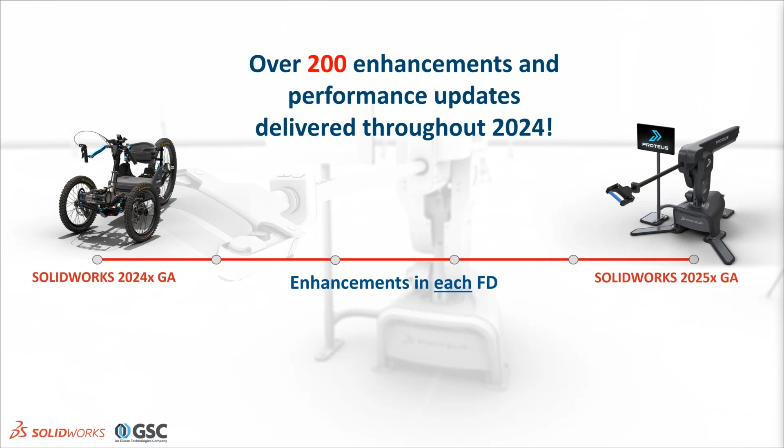So anyway, that's what we're talking about now. It's not just we wait. If there's new functionality or a performance enhancement code that is ready to go, we're going to deliver that as soon as possible and not just wait till the arbitrary end of the year to put it in one big mass release. That's an evolution you're seeing now, and you're also going to see that as we go forward.

With that, we're going to turn our attention now to this episode, episode 3. We're going to be talking about the next generation tools in the guise of SOLIDWORKS Cloud, DraftSight, and SOLIDWORKS Ultimate. Now, SOLIDWORKS Cloud is what Dassault calls it.

These are the X applications. They're not exactly SOLIDWORKS. They're the future kind of, hey, what do we do when we don't use Windows anymore or whatever? We want to be cloud-based completely in a browser. That's the X applications, and there's a bunch of different ones out there that have different functions and different names. Collectively, they're calling it SOLIDWORKS Cloud. I'm not super wild about that, to be honest, but that's what we're talking about.

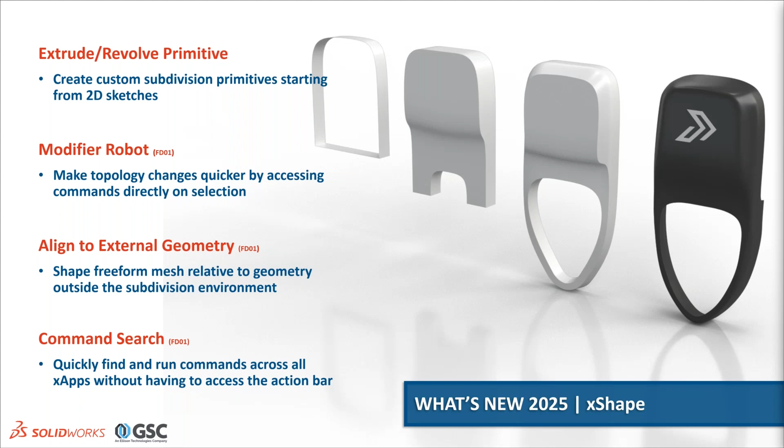So we're talking about X-Shape, which is our subdivisional Class-A type surface modeling, but super advanced. We're talking about some of the enhancements we've made to that, which are very much user driven, making things easier and also more familiar to CAD-like workflows we've done in the past.

Also in our X Design app, which is more of the part and assembly type app, we have a lot of new things there. Again, some of these you recognize, things that have been in SOLIDWORKS for a while that have made it into X Design.

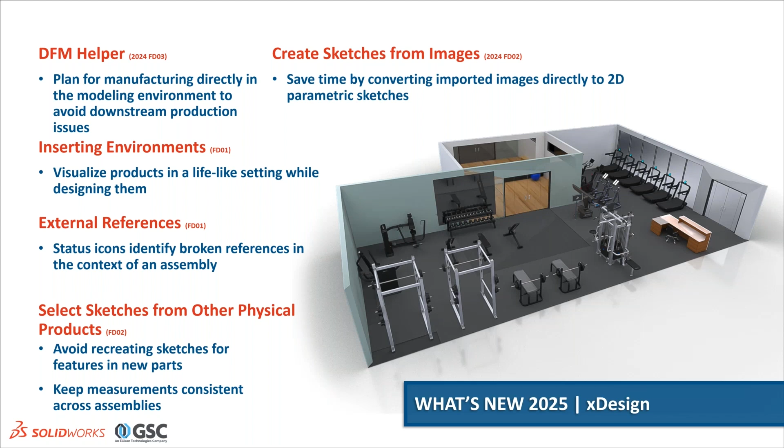I also want to touch on X Drawing. Some people were like, well, once you get into cloud-based, browser-based 3D modeling, you're not going to need drawings. I remember people early on in SOLIDWORKS back in 1995 and '96 thinking the same thing. Of course, we always need drawings. So we do have a browser-based app, and it's getting enhanced all the time to be as useful as what we're used to on the desktop side.

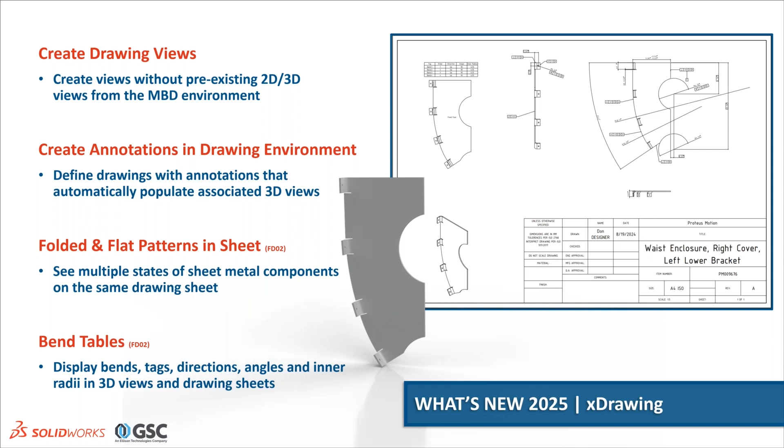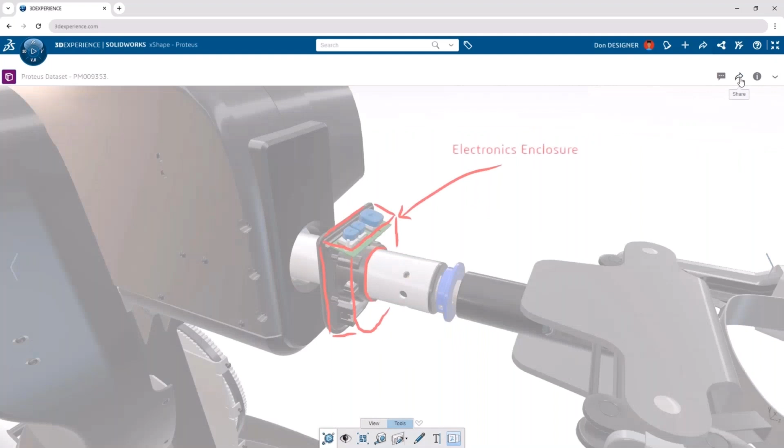First thing I want to talk about is communication. Right inside the X apps, we have all the collaboration tools built in. I get notifications, I can go right into my collaboration conversations, I can share things directly in there, not just screenshots but also markups. I can go into communities, all that right inside of my X app, right inside that design interface.

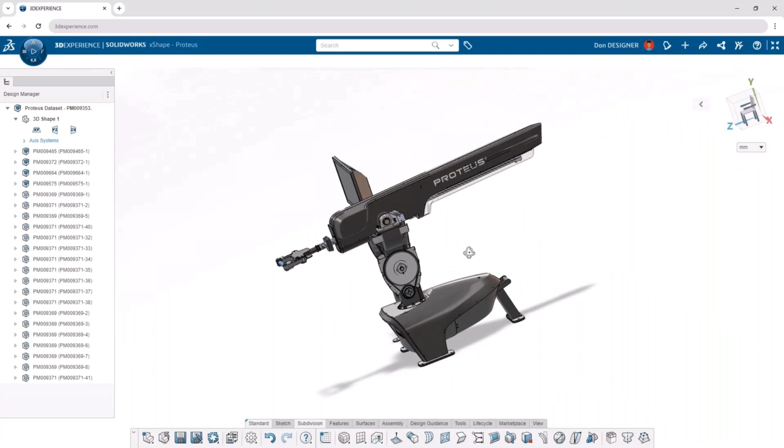Also, this is very welcome: we have a content tab now where you can just go in there and see all your stuff in 3D Space or 3D Drive or your bookmark area without having to have separate widgets and go to different panels and different tabs in your browser. They're right there, kind of where you want them to be.

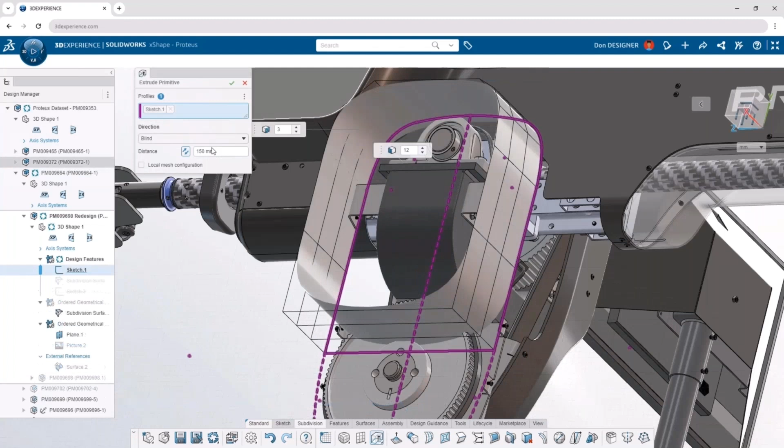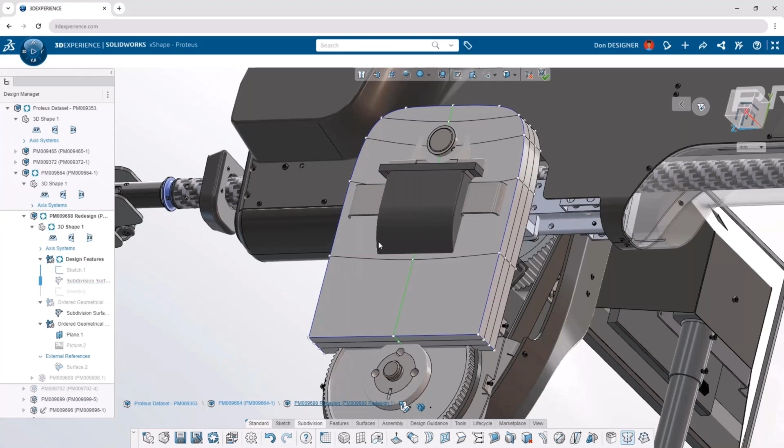Another nice thing coming from the traditional SOLIDWORKS world is we can now take sketches and extrude primitive items right into sub-D surfaces. So I can draw a shape and right away get a sub-D surface out of that, and I'm right in the sub-D modeling environment as I do that. I can go in there and do my creases, corners, symmetry, fill edges, all that kind of stuff. So it's like I draw a sketch, extrude it into a unique sub-D primitive, and then I'm right in there doing sub-D modifications on it. It's a traditional workflow meets subdivisional modeling.

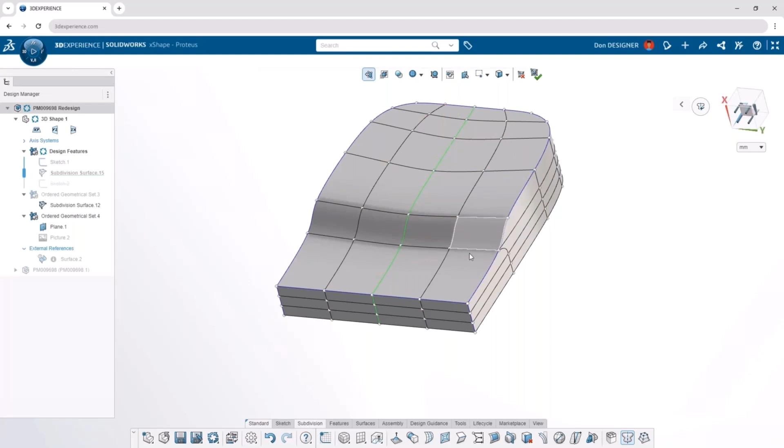In the sub-D environment we also have a new modifier robot, sometimes called a triad, but it's intuitive and context sensitive. Depending on what I have grabbed and where I'm moving things to, it's going to add material, insert loops, or create subdivision, all with one robot. It's a simple 'A' key to activate the shortcut, and you grab stuff and move the robot and it does any of those commands intuitively and automatically depending on how you use it.

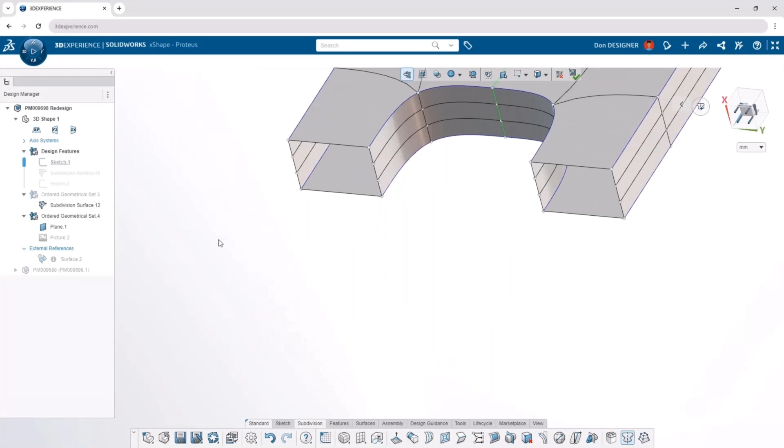We also have command search like we do in SOLIDWORKS, so the S key will do that. It's also going to bring up the revolve primitive, just like the new extrude primitive. So I can revolve a primitive based on a sketch, and that gives me right away a subdivisional surface I can modify immediately.

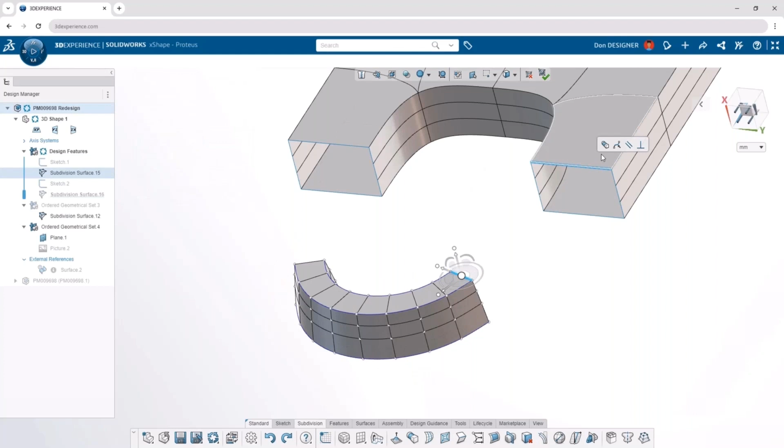Also very welcome, we now have a merge command, so you can merge surfaces together. Just be careful that you have an equal number of edge loops between the two open edges for the best results—kind of like when you're lofting, but with sub-D surfacing.

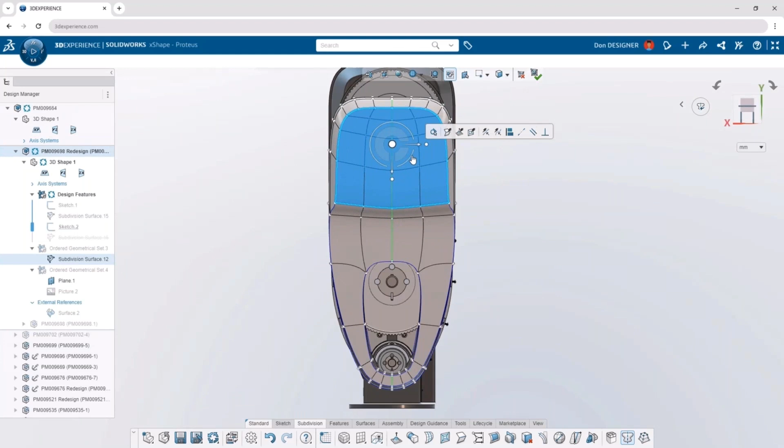When you apply a merge, right away you have a new surface that you can immediately work on. It's active, but it also keeps your old surfaces in the tree so you can reuse those anytime you want. And you can apply your typical things to move the shapes around with the robot, including influence to grab certain areas and change the influence of what you're moving around.

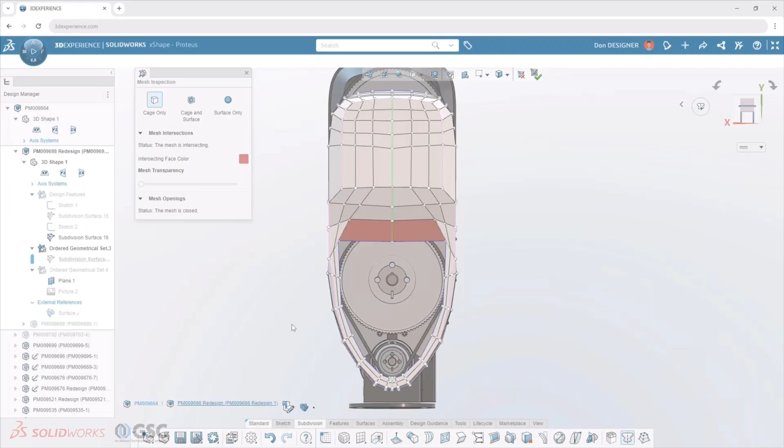We have a new mesh inspection tool which helps us see any creases or areas where the cage is not uniform. You can look at it this way, but what's also cool is that you can sculpt while this is active. So you don't have to turn on the tool, see the problem, turn it off, do the sculpting, then turn it back on to check—it's all in one shot, much more intuitive to do that kind of work.

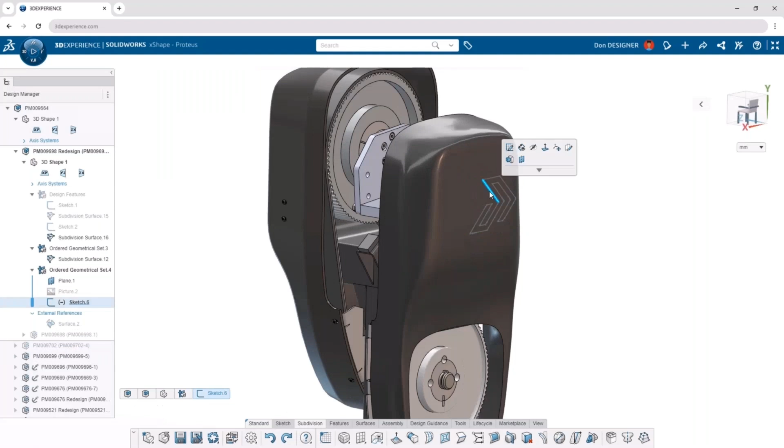We also have an image-to-sketch tool now. You take a 2D image like a JPEG and convert it to a sketch with sketch elements that you can use for extrusions or whatever. It's best to use high contrast graphics—light on black is best versus gradients—and the higher the resolution, the better it works, so a 4K image is better than an 800 by 600 image.

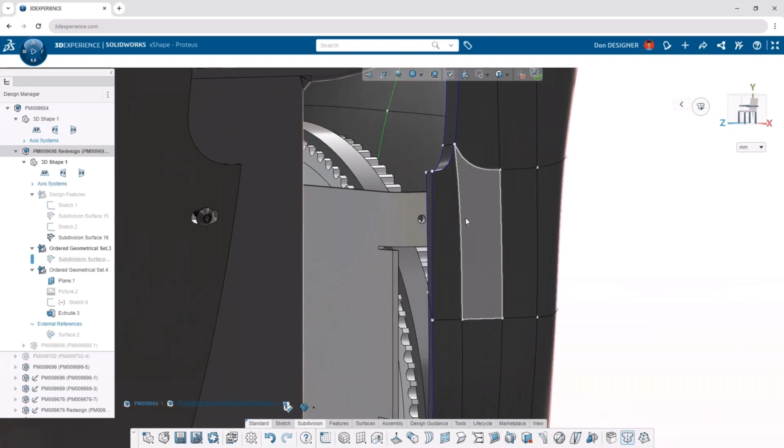We also improved some of the external geometry referencing here. If I'm modifying a sub-D item, I can reference it to non-sub-D elements like the edge of this sheet metal piece, for example. And I can also select sketches from multiple physical products, like in an assembly situation, so I don't have to duplicate the geometry to be able to reference these things.

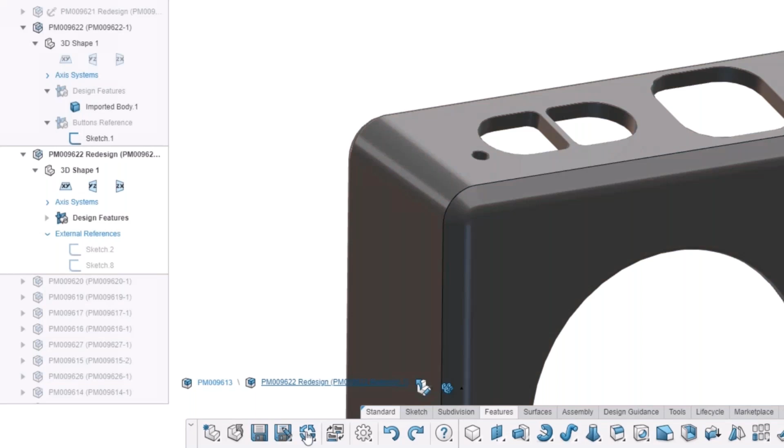It's a lot more intuitive, more SOLIDWORKS-like, you could say. I could choose a sketch from whatever component I want, anywhere in any of the physical products or parts, and base a cutout from that, for example. I can either break the relation or leave it intact, so that if the sketch gets changed or something updates, I can run the update command, say go ahead and fix that up, and we'll get the new sketch geometry as well as the new feature geometry based on that.

Creating patterns, linear or circular, is easier now because we have an on-screen graphic display for those. So you can easily, intuitively do that or type in the numbers. We can skip instances if we want to.

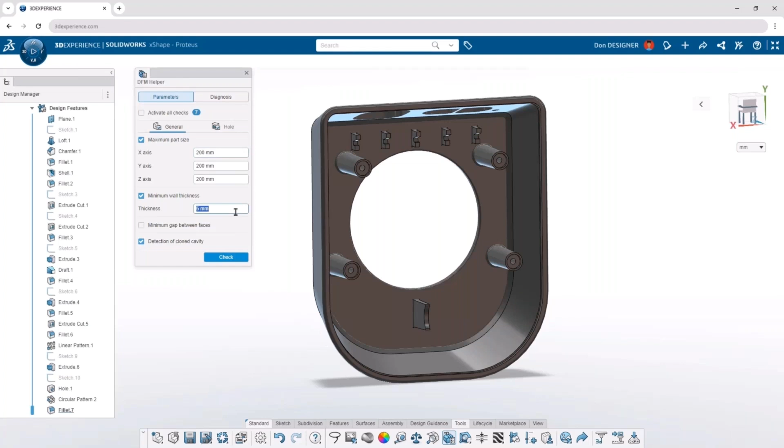And also we now have a DFM helper that just looks at the reality check. So things like minimal wall thicknesses, or if I'm looking for a closed cavity, I want to make sure I have something like that for a molded part, or I can look for holes in a certain range of sizes, so people aren't needing specialty fasteners, that kind of stuff. So it's a DFM helper that's built in here with the X apps.

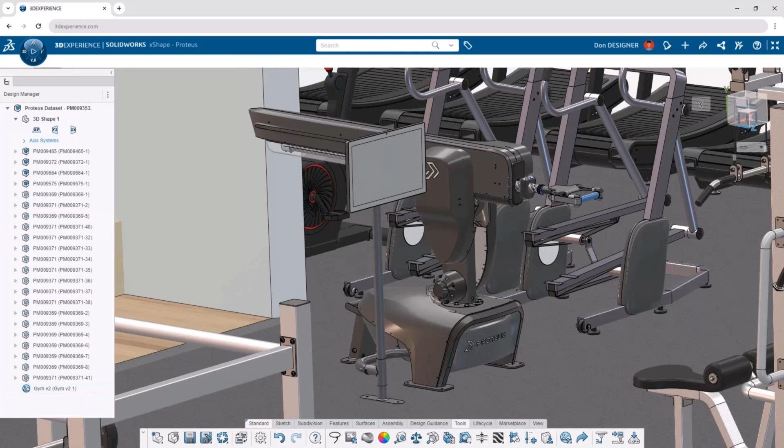And then also we can insert environment envelopes in assemblies, so you can grab an environment; there are some built-in ones, or you can modify your own. And you can throw these things in an environment. It's a 3D model basically, but it's not part of your design as such. You can manipulate the items in the environment in space, and you can turn them off and things like that. Just a quick way to put your actual product into an environment, for props and things like that, which is great for rendering and whatnot.

Now, assemblies have been upgraded in a number of different ways. The insert component command remembers the things you've recently been working on, so you don't always have to search. You just insert it and, oh yeah, that's the thing you were just working on, so we'll make that available for the insert command. Smart mates still simplify things by adding mates while dragging and dropping. You can also use zoom to selection while you're doing this now, which isolates where you're working and zooms you in there.

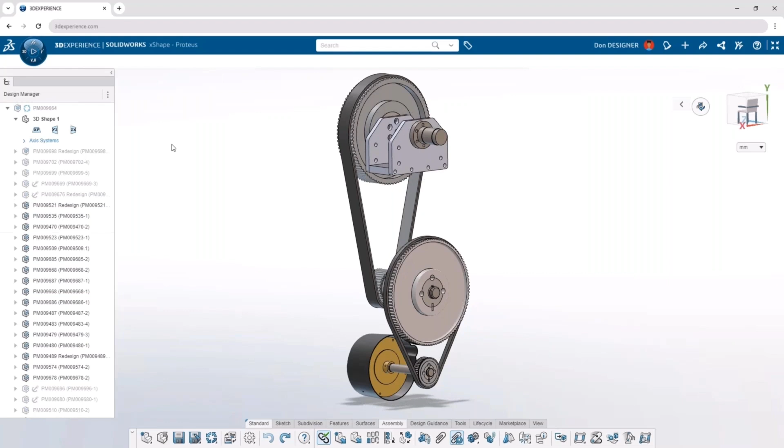Also in assemblies, when you isolate components, you can now isolate with dependents, so you can show things that are attached to it, dependencies, intuitively and quickly, as opposed to remembering what they are and individually doing that through the tree or the graphics window.

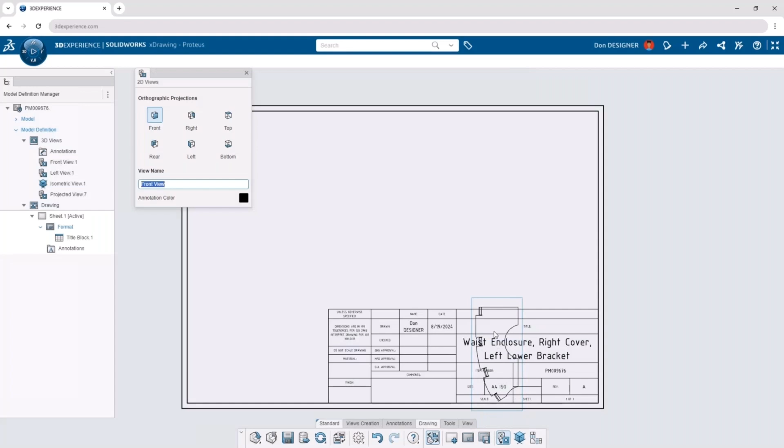Now let's look at the xDrawing tool, which allows us to make 2D drawings or 3D MBD type documents right in a browser. A lot of enhancements are going to the 2D side. To be honest, it's what people are looking for. So we can create views in 2D or 3D. We can do the typical annotations that we normally would based on the standards we're using in our drawings. Again, I'm using an ISO standard here. Add dimensions as you normally would.

Also, we can create hole callouts. You can leverage stuff from the model in 3D as well and use those in our drawing. And anything that we do on the 2D side, we're actually doing in the model. So it's captured on the 3D side so that you can use it for MBD workflows. In SOLIDWORKS CAD, MBD and drawings are separate items. If you do MBD stuff, you can show it in your drawing, but not the other way around.

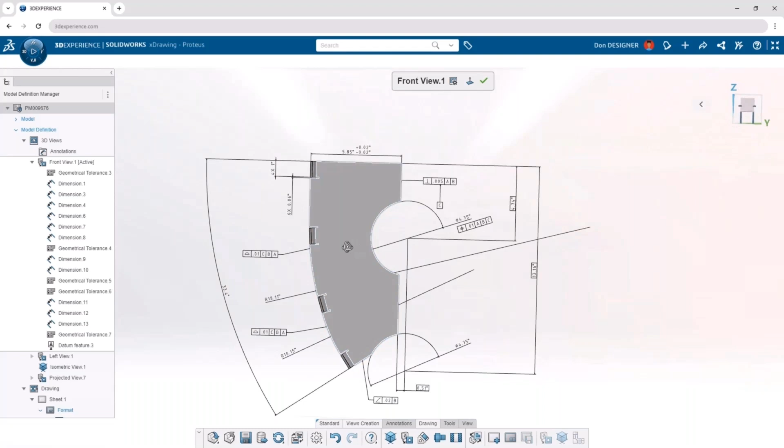In xDrawing, you're actually working on the model even though you're working in the views. So when you add annotations to your 2D drawing views, they're also available in the 3D model automatically. That's a very cool new paradigm to be working in when you're documenting your models. Again, we have the same kind of thing we had before, and it's intelligent, so it knows whether you're in drawing mode or 3D mode.

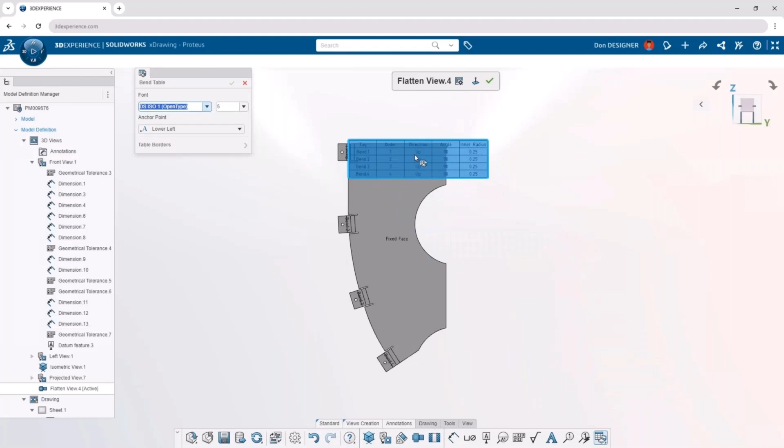We can now have bend tables, and I'm doing this right in the 3D model environment to show different things here. When I flatten it, it shows a bend table. When I go into xDrawing, all that stuff is available in that flattened view from the 2D or the 3D model.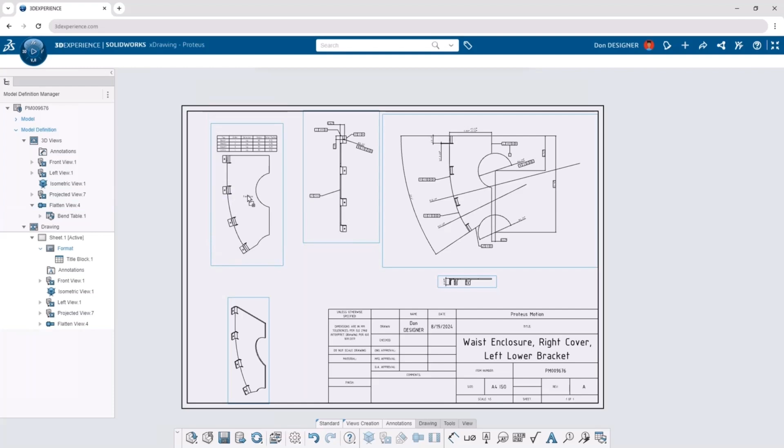So yes, X drawing has a lot of room to grow in terms of functionality and being able to do all the myriad specialty annotations that we've enjoyed with SOLIDWORKS drawings being around for 33 releases. But understand that for this future state, X drawing is a different way of looking at your model, and it truly is working with the model in the background. So you don't have this divide between 3D annotations and 2D annotations. Whichever app you're working with, whatever you do on the 3D side goes to the 2D side or vice versa. It's a very cool way to work.

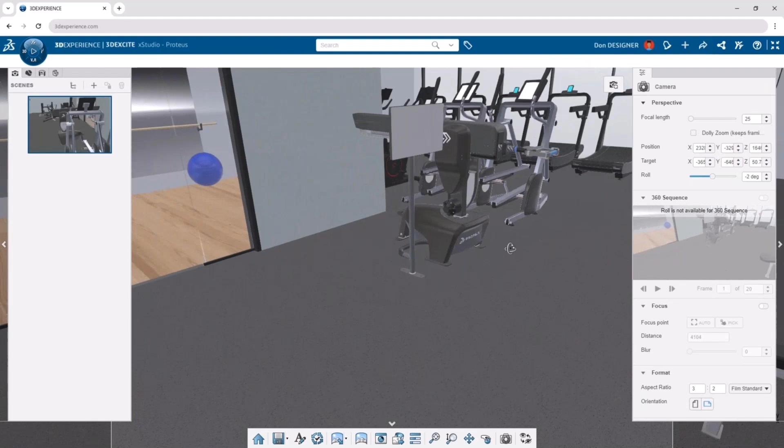And the last thing I want to highlight in the SOLIDWORKS Cloud offerings is X Studio. We have X Sheet Metal and other things too, but X Studio is sort of an unsung hero in that you can actually do nice photorealistic renderings in X Studio, but you're in a browser again. So it's, again, not having to work on a local machine and take up all the resources there. You can't do everything that Visualize Pro can do at this point, but you can do quite a lot.

If you're just trying to get some nice materials put on things, some nice camera effects, being able to really quickly get the standard orientation and size and aspect ratio and just pop out some quick renderings, you can actually do that right inside your browser with the X Studio app. That's, again, part of what we're calling the SOLIDWORKS Cloud suite of browser-based tools. So that's SOLIDWORKS Cloud, the X apps and some of the enhancements there.

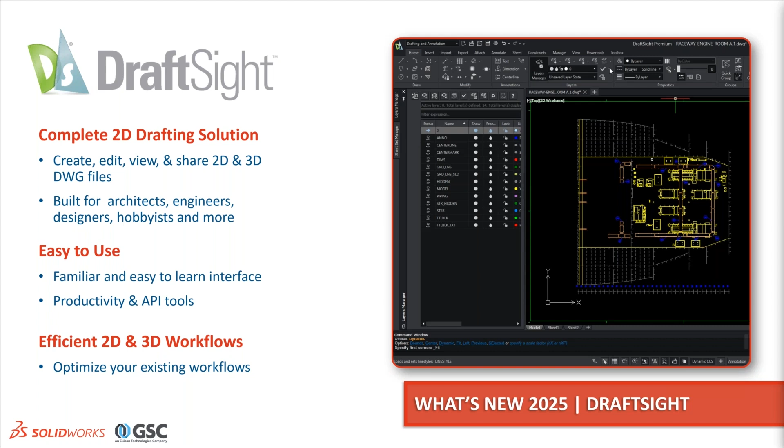And now I'm going to talk about DraftSight. I also say this is a next generation tool because, yes, it looks like the 2D CAD that you may have used in past jobs or college or even high school, but it's evolving to be traditional 2D CAD plus. So you're seeing a lot of those enhancements here in 2025 for DraftSight, like Premium, for example. So a lot of niceties here, again, for both 2D and 3D.

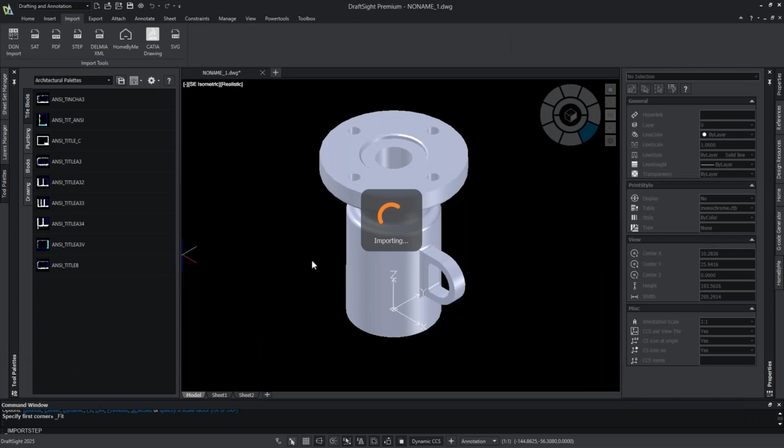So for example, in DraftSight Premium here, I've got 3D as part of it. So if I want to bring in a 3D STEP file, I can do that. Bring that in, place it. It'll be at the origin orientation, and then of course I can move it around like a block kind of thing.

Also, before there was SOLIDWORKS, there was MicroStation for me. Ask me or my brother about that.

We can now export to DGN format, which is the MicroStation format from Bentley Systems and previously Intergraph Corporation. A lot of AEC houses and architectural firms have been using MicroStation and still do. So this is a welcome addition.

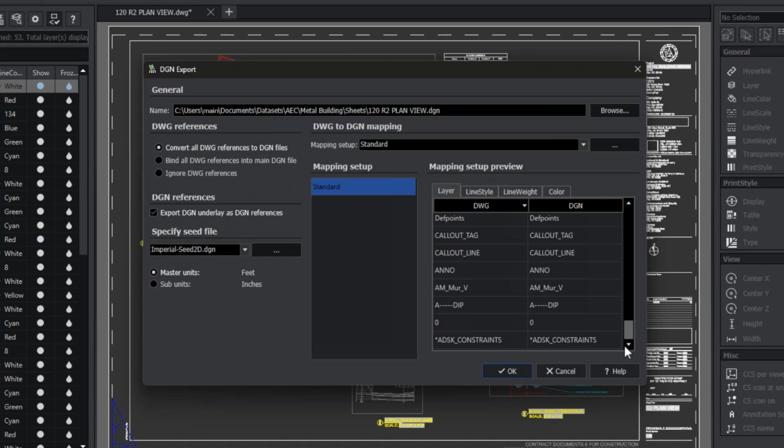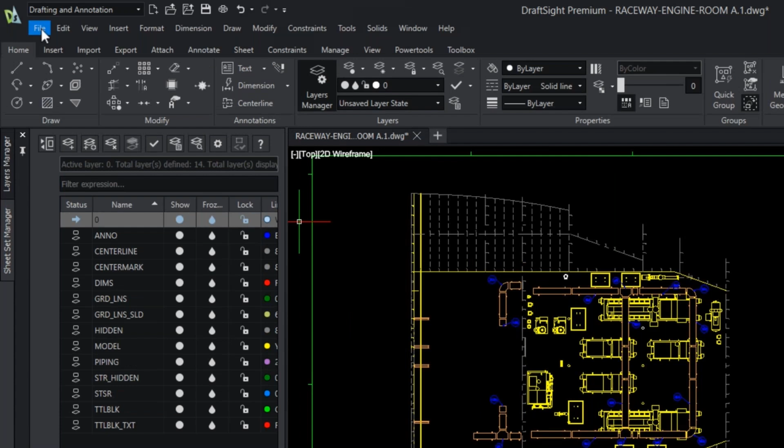Also, we have custom block visibility. So when you do custom blocks, there are little controls, so I can switch, like, I'm doing two drawers or no drawers, or how many doors, that kind of stuff. You can do that right inside there. And then we also have, if you want, a persistent menu bar. Pull that up there, and now it's at the top, if you like that more old school way of interacting.

We have a palette now that shows the block structures, so you can turn them on, hide them, organize them, or even isolate blocks, or even work with blocks inside of blocks, which is a thing in the DWG world. So you have access to all that in a nice tree organizational palette.

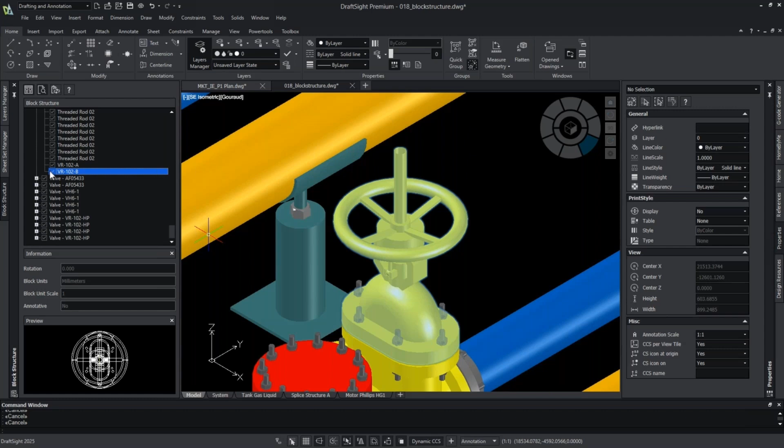And another cool thing is sometimes you get drawings where things are all at different Z heights. You can now grab a bunch of stuff, or everything in this case, and push a button, and it'll put them all on the main level that you define, in one place, one Z height.

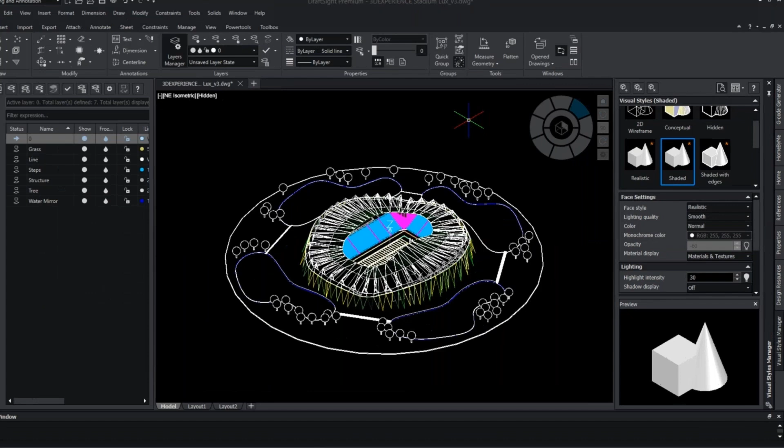Also for 3D, you have different visual styles, like shaded with edges or not. We now have a manager that lets you have presets. You can make your own presets as well, and you can modify these as you wish if you're working with things like a DTM or something like that.

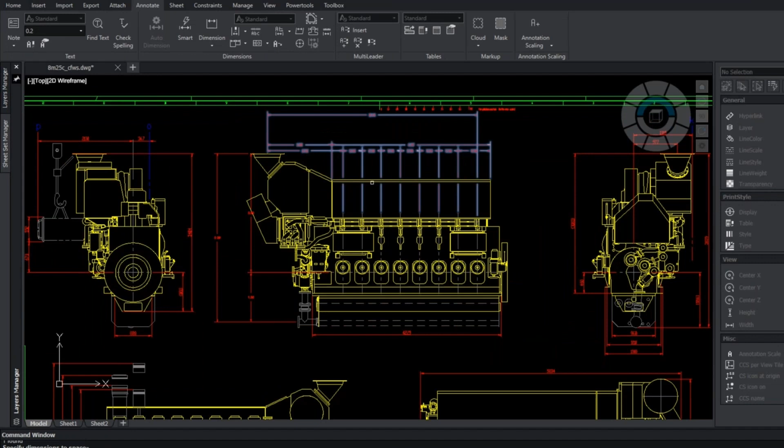And then we also have a nice little spacing command for dimensions. So I can grab a dimension and a bunch of others and say, go ahead and space them using the first one as the target, and bring these other dimensions to it. So it's a very quick way to organize the positioning of dimensions that are stacked up.

And we have a lot of enhancements to tables. For example, we can do automatic formulas. My favorite thing here is the table break. It's intelligent and it's interactive. So as I pull up the rows on one, it goes down on the other one, etc.

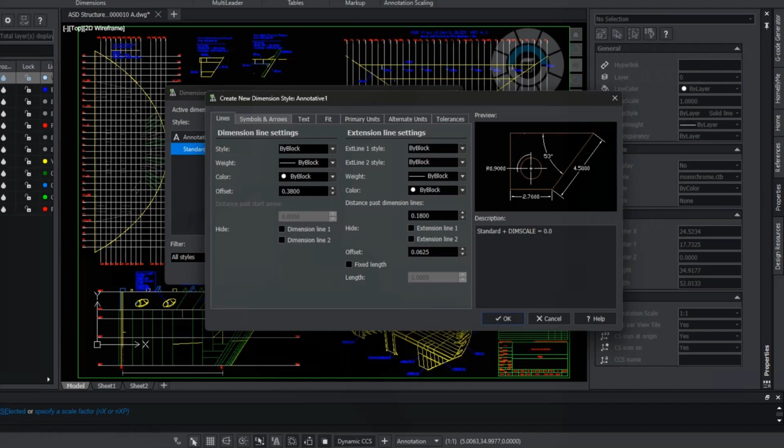And of course, you have other things like formatting for cells and rows and things like that. And then all these dimension styles that you can create inside DraftSight, we now have a manager where you can actually do it all at once, create new ones, modify ones, and then from here you can also share them out so other people can load them into their DraftSight and use them as well. So a lot of cool enhancements to DraftSight.

And then the last thing I want to talk about, it's not going to be a bunch of screen captures that I've done or anything like that. But I want to talk to you about a new version, I guess, a new level of SOLIDWORKS offer, as we call them now. So you're familiar with SOLIDWORKS Standard, SOLIDWORKS Professional, SOLIDWORKS Premium. Those have been the three levels we've had for many, many years. Now we have a fourth level called SOLIDWORKS Ultimate.

And what SOLIDWORKS Ultimate is, first and foremost, it is 3DEXPERIENCE SOLIDWORKS Premium. So it comes with all the things that SOLIDWORKS Premium comes with, and then the 3DEXPERIENCE SOLIDWORKS Premium offer comes with what traditionally would be with SOLIDWORKS Premium plus a number of, not all, but a number of the X apps. So Sculptor, the mold creator, the manufacturing definition creator, i.e. the MBD thing, etc. So it comes with that stuff.

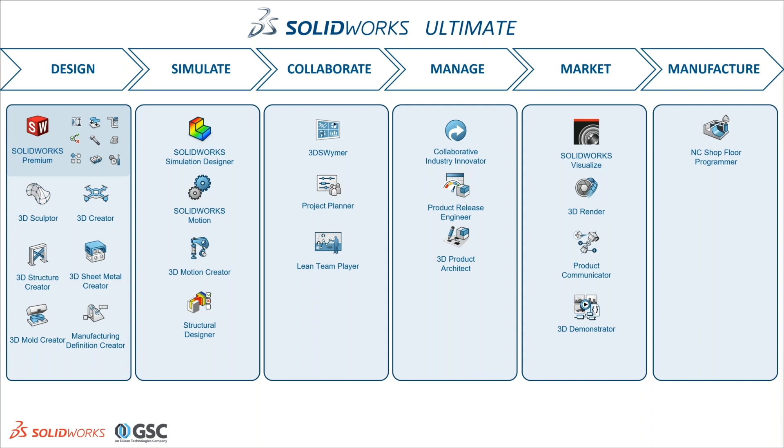So you have that robust and efficient design. Again, most people are going to be using SOLIDWORKS if they have it. But if you want to go into a browser, especially for xShape, for example, for the sub-D modeling, that's really a good complement. But it's all there. But also you get stuff in simulation, collaboration, marketing, manufacturing, all that. So you're going to get Simulation Designer and Motion, 3D Motion Creator and Structural Designer.

So some really nice, robust simulation tools, as well as some collaboration tools like Project Planner and Lean Team Player, and those kind of things. Of course, access to 3DSwymer. So that's all part of it, as well as being able to do product definitions and things like that right inside of the platform.

And on the marketing side, you get SOLIDWORKS Visualize, as well as that browser-based 3D rendering tool, as well as a couple other ones, Product Communicator, sort of a light version of Composer in a browser if you wish, and Demonstrator, sort of another side of that. So you get some of that as well, and also NC Shop Floor Programmer, which, by the way, everyone gets, but it's part of this as well in 2025. So what you get is all these tools.

Now, is anybody going to be using all of these? Any one person? And again, this is licensed to one person, so it's not like these are a thing you divvy out to other people. So who would use all of these things? My answer is probably no one. Maybe someone like me that works for a reseller might do that. But most people who are doing structural design and things like that aren't necessarily going to be doing lean team stuff or project planning or doing product releases.